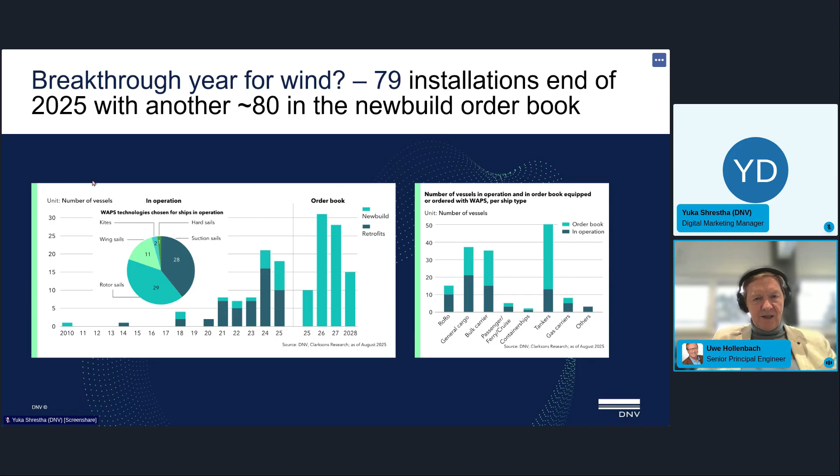On the first slide, we can have a look at the market overview. We believe this year could be a breakthrough for wind. At the beginning of this year, we have 79 installations and another 80 in the new build order book. In the order book, we have only the new builds, as typically the share of the retrofits is even larger than the new builds. So it could be that we have a much larger number coming into play this year.

We see that wind is on the rise since approximately 2020, 2021, with 5 to 10 vessels every year. And then it sped up in 24 with more than 20, and in 25 even almost 20 vessels. We see installations on ro-ro vessels, general cargo vessels, bulk carriers, and tankers. Most installations are on tankers at the moment, and we see basically three technologies: the rotor sails, the suction sails, and the wing sails. A little bit more on this you see on the following slide.

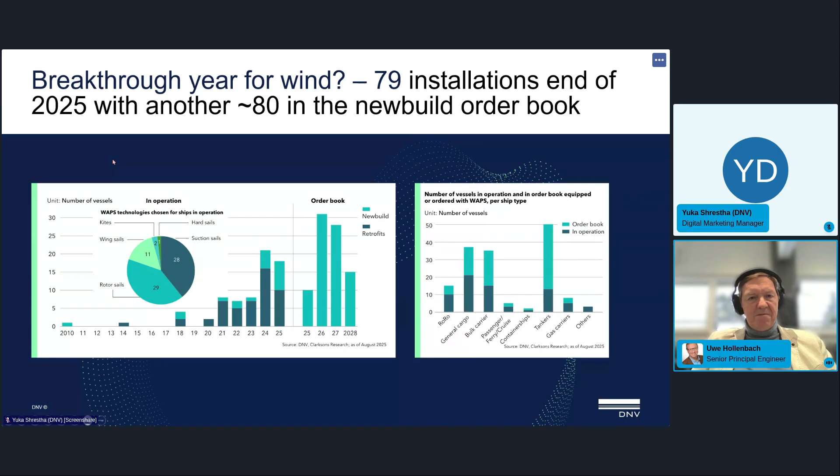This is what is in principle available on the market: rotor sail, suction sail, wing sail, soft sails, kite. As said, it's basically the first three which we see today on merchant vessels. Soft sails, of course, are the traditional sail we still see on smaller vessels. And we see, for example, the modern square rigger, which is a kind of combination of the modern sails and the traditional ones. And then the very sophisticated one, the kite, but this has not yet emerged so much. In all cases it's cutting-edge development; advanced aerodynamics, automation and control, and modern materials drive the innovations.

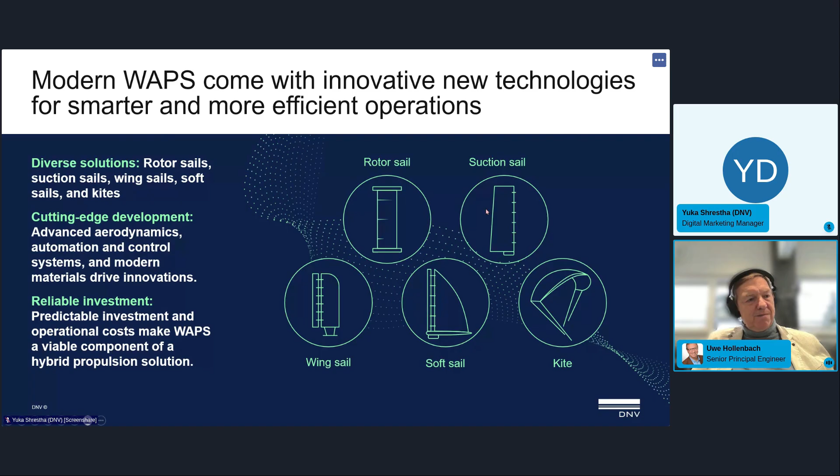Going to the next one. What do we see today? These are two pictures from vessels already in operation. With these vessels, fuel savings of 5 to 20% have been shown, and this directly translates into greenhouse gas emission savings, and under favorable conditions, even higher savings are possible. You see the large bulk carrier with the 5 rotor sails, where the vendor expects savings up to 6% in fuel consumption, and below this a smaller ro-ro vessel fitted with 4 large wing sails, where the vendor expects savings of 15%. And in principle, this I can confirm.

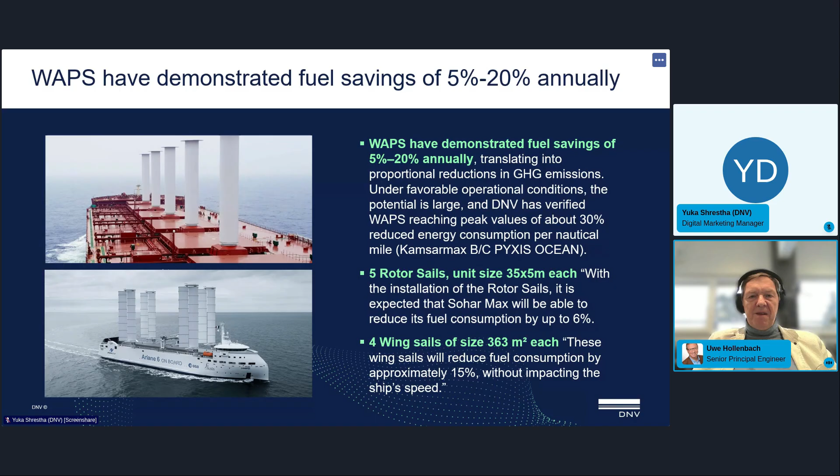It must be noted it is always mentioned up to 6% and up to 15%, but what this means exactly, I come to later. We have another two examples on the next page. This is what I mentioned earlier, soft sails. This is a modern square rigger. On the photos, you see two large super yachts equipped with three-mast rigs. So this is, let's say, a play tool for rich people, you can say.

But Greenpeace is right now building a campaign and research vessel at Spanish Freire shipyard, equipped with two of these huge sails, each of 1,000 square meters sail area. It's a small vessel, but it's equipped with diesel-electric propulsion and with the possibility to regenerate power from the sails when more sail power is available than is needed for propulsion. With such concepts, you can expect that easily more than 40% annual fuel savings compared to same-sized conventional vessels can be reached.

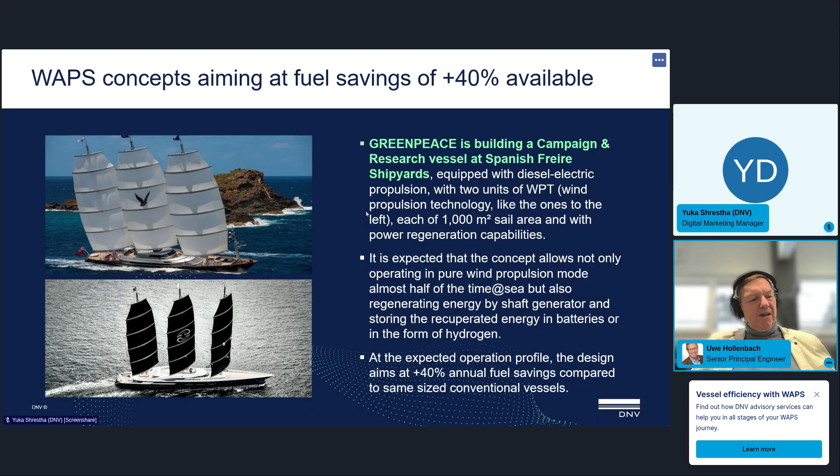Going to the next slide, please. So how much can I save? This is the first question we are asked. How much can I save and how can I predict this? We are defining a route the ship owner is interested to sail. We have a simple sail model for this, and then we are simulating the voyage.

Here in this case, based on bi-weekly departures, we simulate over a period of 5 years. It could as well be 10 years. And this means we simulate both in eastbound and westbound direction. We simulate in total 120 voyages in one direction and 120 in the opposite direction.

What's the outcome of such studies? We see here an average utilization of 74% of the sails. But we see as well that the voyage with the least utilization was 28%, and the voyage with the best utilization was 98%. So there's quite a scatter in the data, and obviously this is driven by the weather conditions. So what about the savings?

Utilization is one thing which is important to consider. Another thing is that there are interaction effects between the sails and between the sails and the hull. So you cannot only sum up the gains you expect for a single sail. You have to deduct a little bit. Here in this case, where we assume that 3 rotor sails are installed, we have considered a reduction of 18% due to interaction effects. And this provides an average power saving of 510 kilowatt over the years.

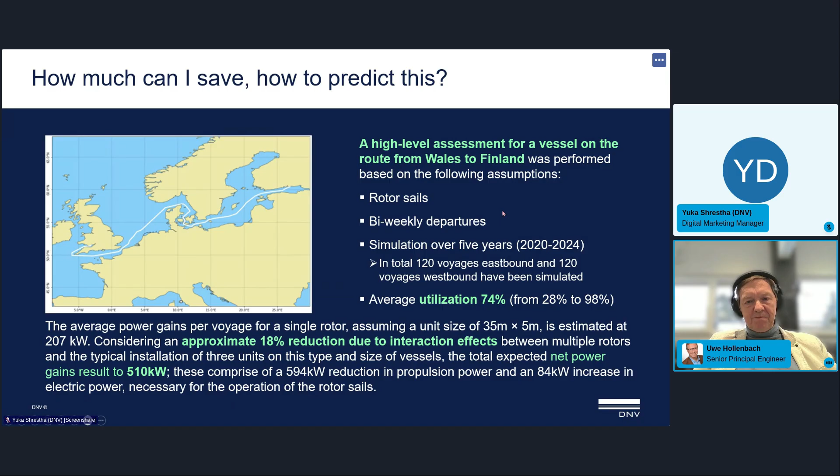So the next slide shows a little bit how this varies over the year. The bigger graph shows how this depends on the season. You see on the table to the right, you have much higher savings to be expected in wintertime, and this goes down during the summer months. And you see as well that this varies over the years. So there are different savings in 2020, 21, 22, 23, and 24. So you cannot expect that the savings are always constant. This depends on the actual weather pattern. What is relatively sure is that you have better savings in wintertime and less savings in summer.

And what is not shown here is that you have better savings in the eastbound direction, because this is with the wind, and less savings against the wind. But on the small graph below, you see the large variability of the savings. In the extreme case, this goes from zero. There are some voyages with no savings or even negative savings, but the saving can as well be around 700 kilowatt. So that's quite a variability in the savings.

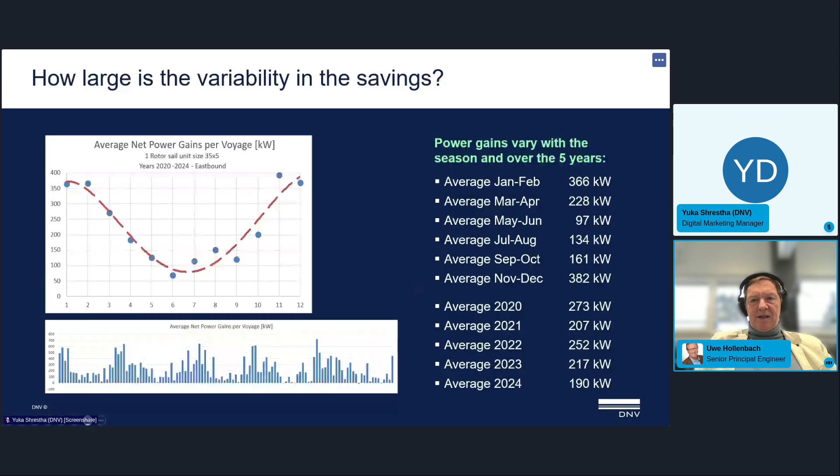And then it's of course interesting, and the next slide illustrates this, how to understand the claimed power gains by the vendor. If I say average power gains, then our understanding is that this is the average over a voyage or over a specified period, for example 1 year, or here in this example, over 5 years. And here we had 510 kilowatt net power gains. Then some vendors claim the average savings when the system is on. That's a different story. The average saving when the system is on, in our case, is 746 kilowatt net power gains. So the difference between the first number and the second one is in principle the utilization.

All the times when the system has been off are not included in this average, while they are included in the first number. And then one can state, my savings under favorable conditions. Here in this case, the best voyage, that was 1,776 kilowatt. So these different numbers are in principle all based on the same simulations, but it depends what you're really looking at, or what the vendor is looking at and telling you. If you look at the best 10-minute average in 5 years' time, this would even be 7,000 kilowatt net power gains. So be careful with the numbers you receive from vendors, and look exactly at the meaning behind them.

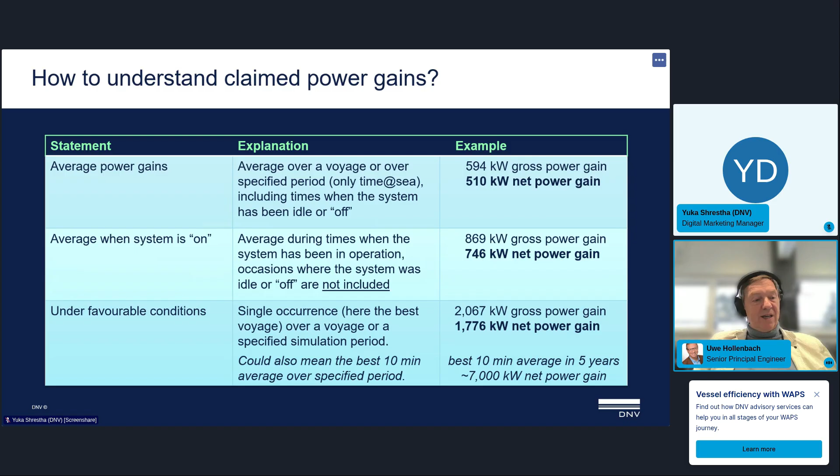Because as said, we see a lot of installation on tankers. At the moment it's mostly medium range tankers. They are often fitted with suction sails. The bulk carriers tend to install rotor sails, but we see as well the large wing sails on, in principle, any type of ship. So probably there are some reasons behind that ship owners find this the best solution.

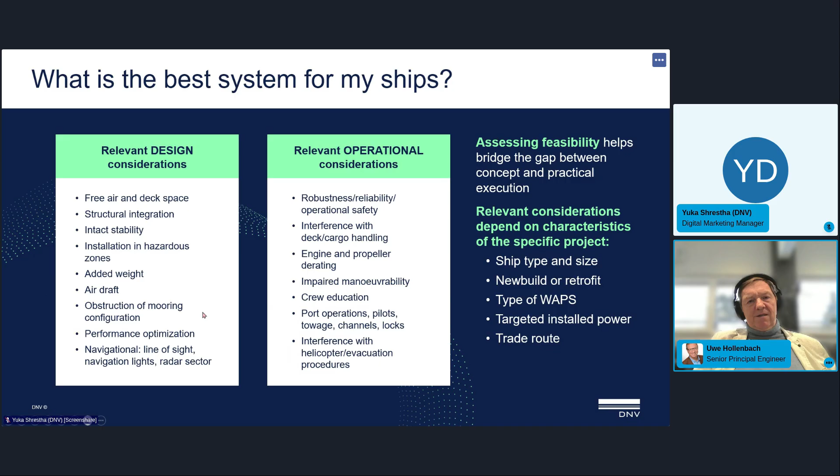So then let's turn this to verification, because of course you want to know how much are the actual gains for the wind system. So what has the vendor promised, and what do I see in reality? For the verification of savings, DNV has worked on a recommended practice for verification of wind-assisted propulsion systems, and the same we have done for air lubrication systems.

And the idea behind this is quite simple. Both of these systems, air lubrication and wind, you can switch on and off. And if you do it directly after each other, then you can compare the condition on and the condition off. And we believe that this is best suited for long-term measurements, to have a large number of measurements, a large number of results, then not only the average savings can be assessed, but as well the uncertainty in the results.

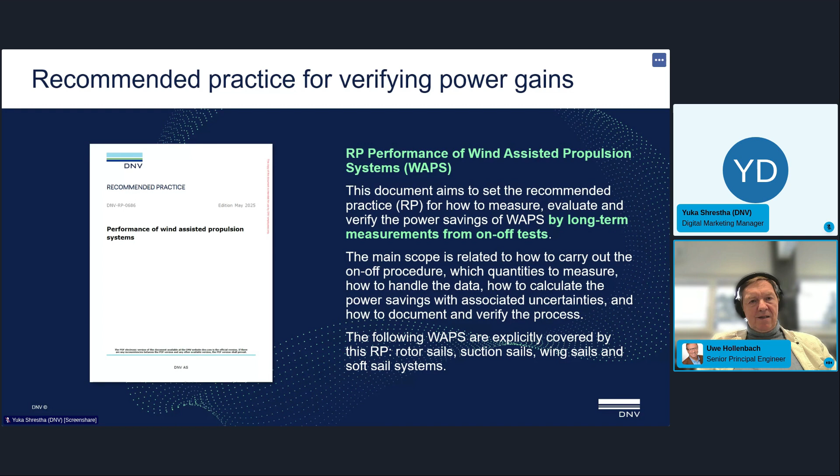And on the next slide, I have some examples of pilot projects we have recently performed. So this is savings by low friction paint. This has been investigated by VTI. This is a different recommended practice. Savings by in-transit hull cleaning. This is as well kind of on-off, meaning that it's before and after. This has been done based on noon data. And then we had 4 projects where the savings of air lubrication systems have been verified. This has been 2 large container vessel series, a Kamsarmax bulk carrier and a Ro-Ro cargo vessel.

And here we are talking about the wind. We had several projects on very large bulk carriers. 2 are finished, 1 is at the moment ongoing. We had 1 Kamsarmax bulk carrier. We had 1 Ro-Ro cargo vessel, at the moment working on the second one, and as well assessing long-term savings on the handy-sized tanker. So this is so valuable because we can then compare our predictions for these vessels, which we can as well do for past voyages, of course, and compare with the actual measured savings.

How can DNV support? So this, of course, at first starts with a certification service for WAPS. We can do an approval in principle for these systems or a type approval. Of course, the vessel can be classified with additional class notation, WAPS or WAPS ready. And then we have our maritime advisory service for wind-assisted propulsion systems.